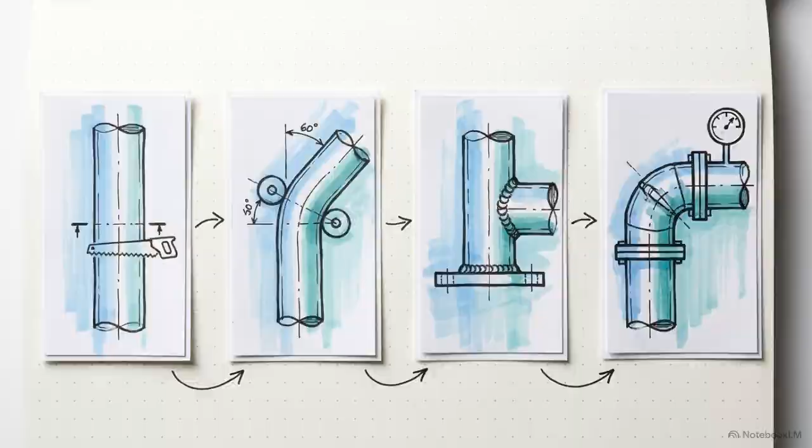At Siam Exhaust, a typical customer order takes 45 days to fulfill. If you ask the factory manager why, they'll defend that timeline as a necessary byproduct of a complex manufacturing process. They'll walk you through the labor-intensive steps: precisely cutting raw pipe, bending it to spec, welding the joints, and finally, painting and inspecting the finished product.

But when you actually time those steps, the math tells a different story. 5 minutes for cutting, 10 for bending, and 25 for welding and painting. The actual physical work on the product takes exactly 40 minutes. This creates a massive discrepancy. 40 minutes of active work is buried inside a 45-day delivery window, leaving over 1,000 hours of time completely unaccounted for.

For Siam Exhaust, the bottleneck wasn't a lack of effort from the workers. The inefficiency was hiding in the massive, unmeasured gaps of idle time between those 40 minutes of production. To fix these delays, many managers look to tools like this, a high-resolution, computerized flowchart. These charts often represent a theory of how work should move in a perfect environment. They rarely account for the physical friction and unpredictable pauses of a real-world factory.

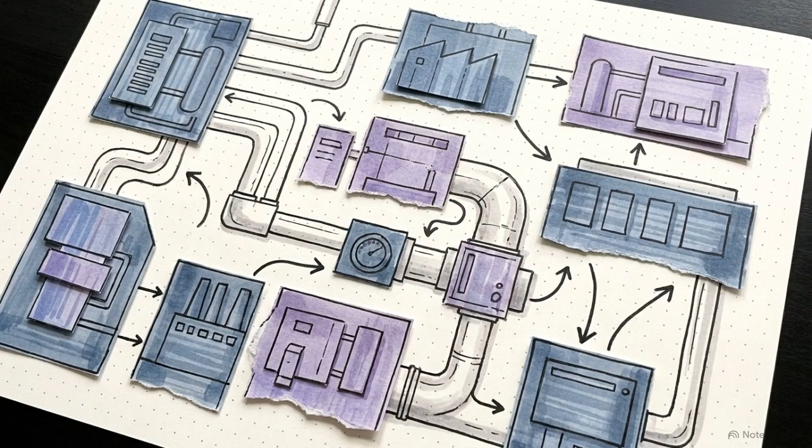To find where that missing time is actually leaking out, you need value stream mapping, or VSM. It's an X-ray of the entire operation that reveals the hidden obstacles traditional charts miss. You cannot fix a real-world, three-dimensional bottleneck by studying a two-dimensional theoretical map. The first rule of VSM is to leave the office behind. Investigators must step onto the gemba, the actual place where the work happens, with nothing more than a pencil and paper.

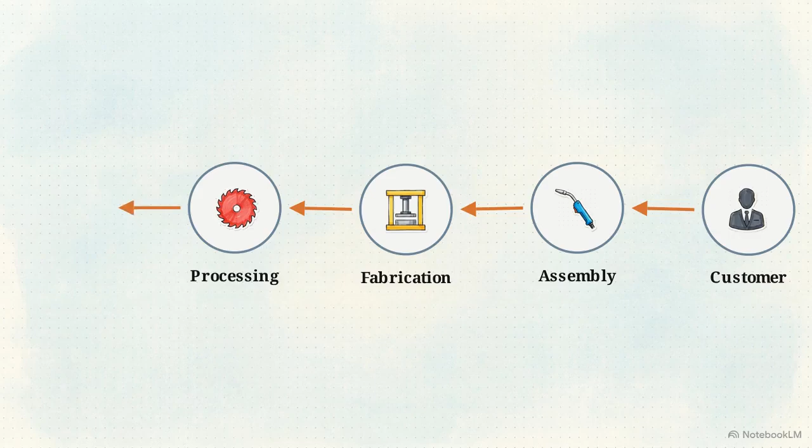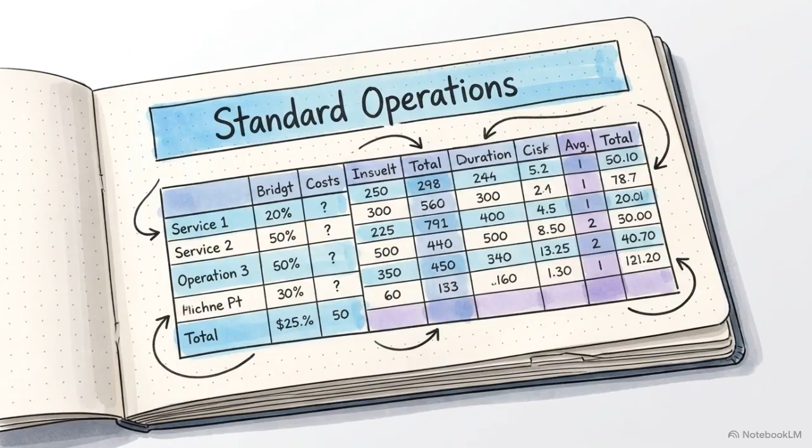The mapping process is counterintuitive. You don't start at the beginning of the assembly line. You start at the very end with the customer and map the entire journey in reverse, working your way back to the raw materials. As you walk backward, you record what you see in the moment, counting the actual parts sitting in bins and timing the machines with a stopwatch, rather than relying on the numbers in the company handbook. Walking the process in reverse reveals where the physical reality of the floor diverges from the data stored in a central office.

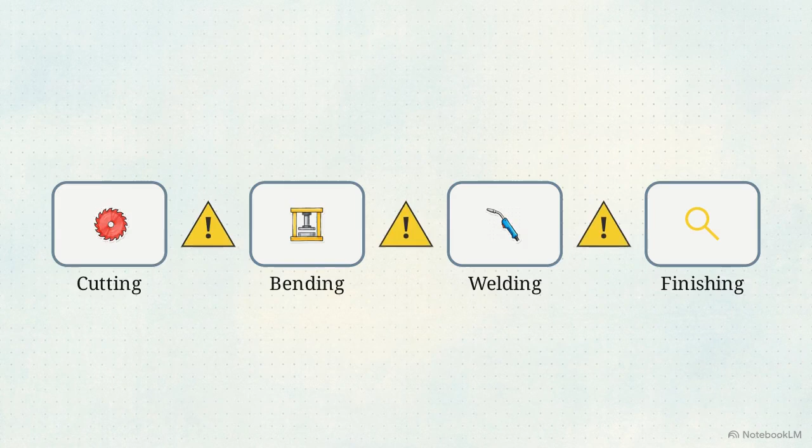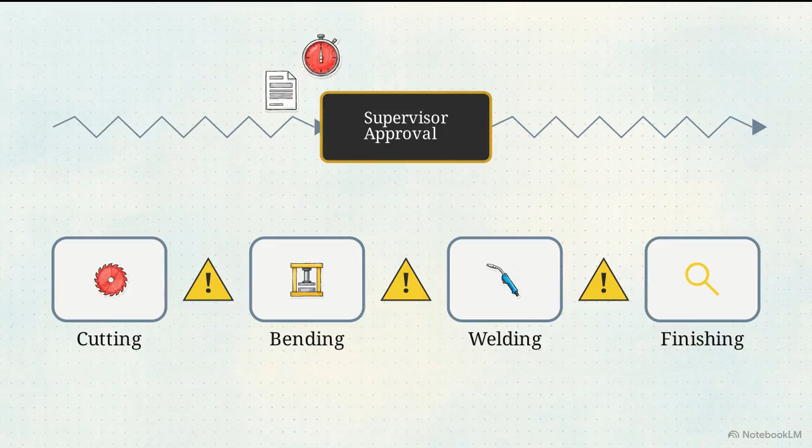A value stream map builds diagnostic power through 3 layers. Layer 1 is material flow, tracking the physical movement of parts and highlighting stagnant inventory. Layer 2 is information flow, mapping how orders are processed via emails, software, or paper slips. Delays are often caused by information. An order waiting for a signature is as damaging as broken machinery.

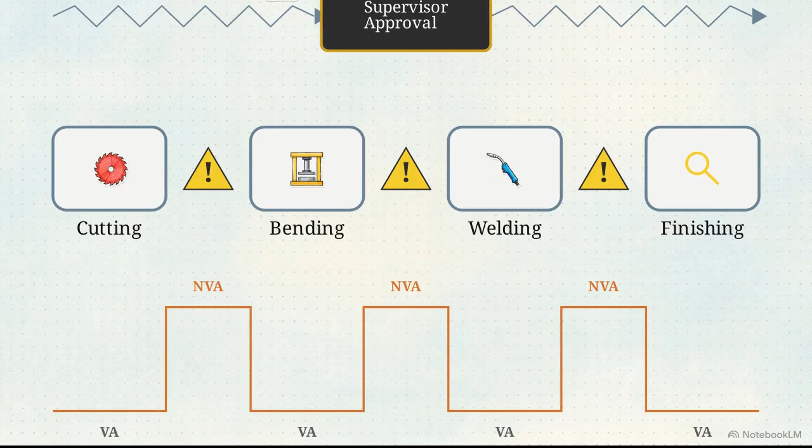Next, we add the timeline. This jagged scale separates value-added time from non-value-added time. This current state map exposes previously invisible time sinks. This bird's-eye view makes it clear. The missing time isn't being lost during the work itself. It's trapped in the mismanaged gaps between departments.

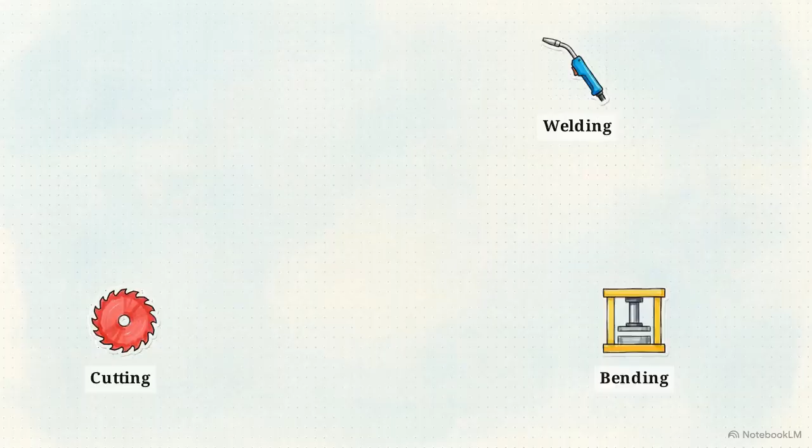Once the gaps are identified, the team uses Kaizen bursts, targeted, rapid improvements, to strike directly at the largest pockets of wasted time. Siam Exhaust used their map to identify these gaps and responded by physically dismantling the walls between their departments. They moved their isolated machines into a U-shaped cell for continuous flow and used a Kanban system to pull inventory through only when the next station was ready. They achieved higher velocity through a smarter system design, rather than simply demanding that their employees move faster.

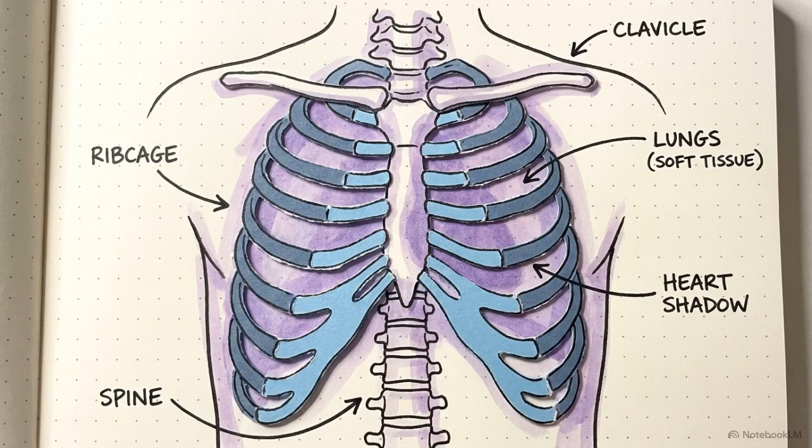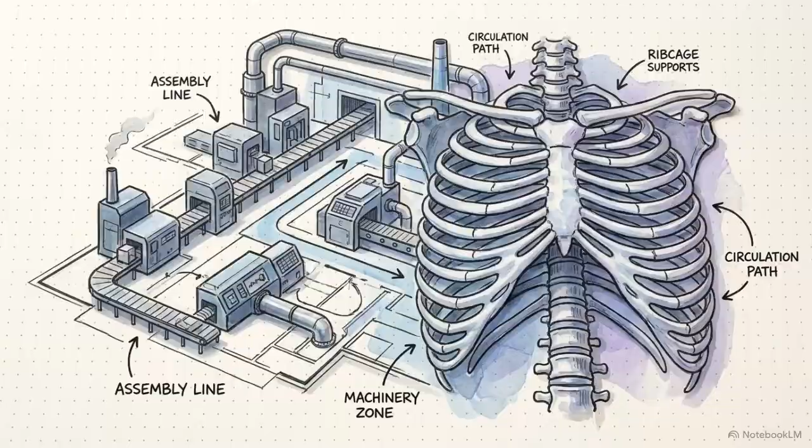The results were dramatic. By eliminating the invisible waiting time shown on their VSM, Siam Exhaust reduced their 45-day lead time to just 5 days. Managing a business without value stream mapping is like a surgeon operating without an X-ray. You risk cutting out healthy tissue while leaving the underlying disease completely intact. The numbers on a VSM provide an objective roadmap for continuous improvements to stay competitive.

But even with a map, the physical workspace must be capable of supporting this new speed. Next time, we'll look at the 5S system, a framework for organizing the physical environment to sustain high-speed flow and prevent these massive waiting times from returning.